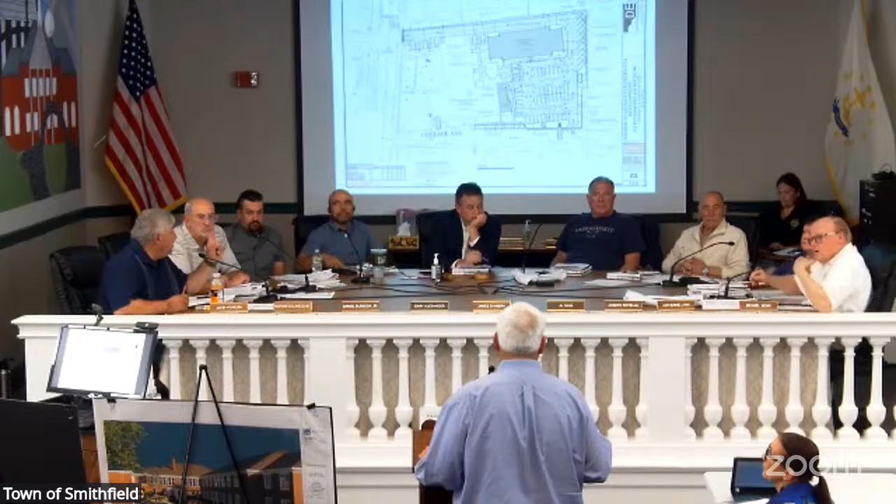Are you here to address what transpired at the public meeting? Not necessarily, 'cause I'm curious as to what other things came up. I think there are some neighbors here that I'm sure are going to speak, but people were concerned about the view from the residences on Hattie Ave. So we addressed that with a row of arborvitaes and an opaque fence along that line. One of the neighbors was concerned about the dumpster placement, so we moved that to a location that we felt was as far away from all of the neighbors as possible.

What was the other one? And the smoke, they were worried about smoking, and it's a tough site because I think the law is they have to be 25 feet away from any building. This is a non-smoking facility. I actually Googled what the percentage of smokers are at that age, and you're probably gonna have about 10 to 12 smokers in this new development. But obviously there's probably gonna be a couple of people that are smoking once in a while outside.

So we wanna work with the neighbors. I'm not sure if we've decided definitely on the front of the building, but we're happy to work with the neighbors on where that occurs. There was another lady who I know is here that has concerns about her driveway and people coming in, which David D'Amico can talk about. I don't want to speak for the neighbors. There was a lot of conversation, and I'm sure you'll hear from them, but we tried to address the things that we could address. Yeah, the arborvitaes were in the plan already to try to screen that property line as well.

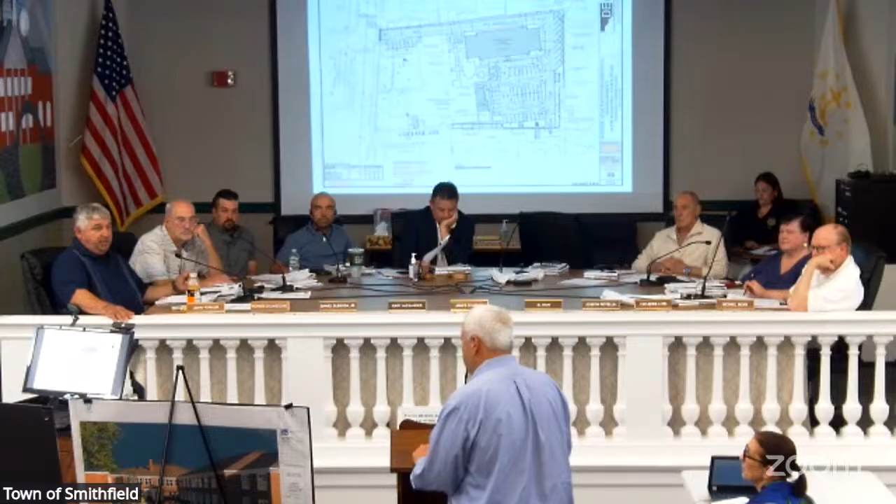I just thought of Papagino's. When you go out of Papagino's parking lot to 44, it's got that curve. If there's a decision to go just right turn only, something that would physically hinder it, so just a thought. I think it's a valid question, concern, and something we should discuss. Absolutely. Thank you.

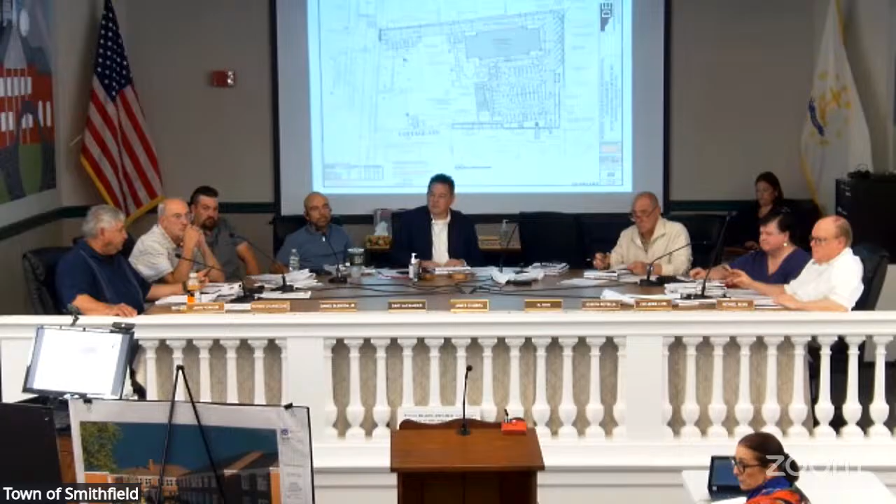So at this point, David, do you want to add anything? I think we're good. Unless you have any questions for the civil engineer, we could probably turn to traffic. I know you have your peer reviewer here, and Paul Bannon's also here. I don't know if you want to hear from Paul first to talk about how he responded. I think you have a copy of his response. I think it makes sense to go with our peer review and then have Mr. Bannon respond. That makes logical sense.

Well, are we accepting the traffic? Because didn't that come in late? It did come in late. When did you receive the peer review? Monday, and we got it right back to them. We got it at 5 last night. Right, but they received the town's peer review Monday, so they turned it around in like 24 hours. So they didn't have much time to respond. We really haven't had time to digest it either, but let's have the discussion and see where it leads, and then you can make a decision. In this case, given that they didn't receive it till late, that's a mitigating circumstance, in my opinion. And that's why it's good to hear from the peer review here tonight, so she can explain everything and give the board time to understand her report.

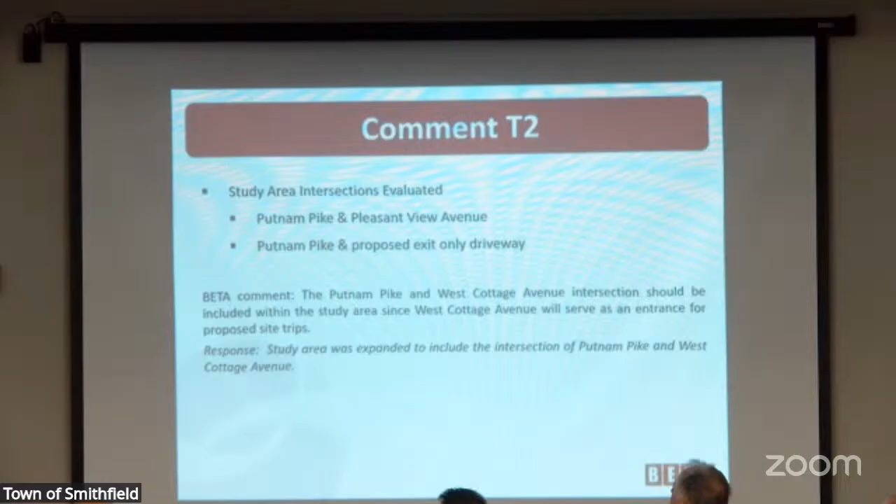Comment number 2, they had evaluated the Putnam Pike and Pleasant View Avenue intersection and the Putnam Pike and proposed exit-only driveway. The Putnam Pike and West Cottage Avenue intersection was not included, so we had just asked them to include that intersection, which they said that they did include that in the study area in response to our comment.

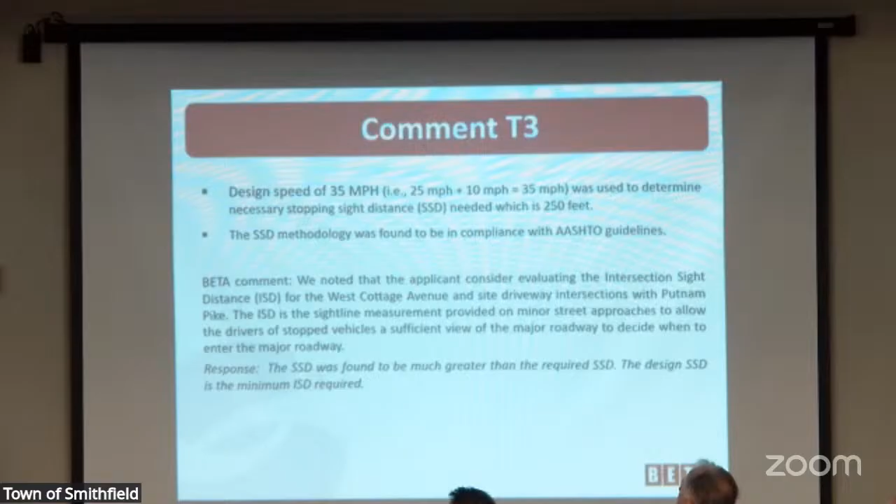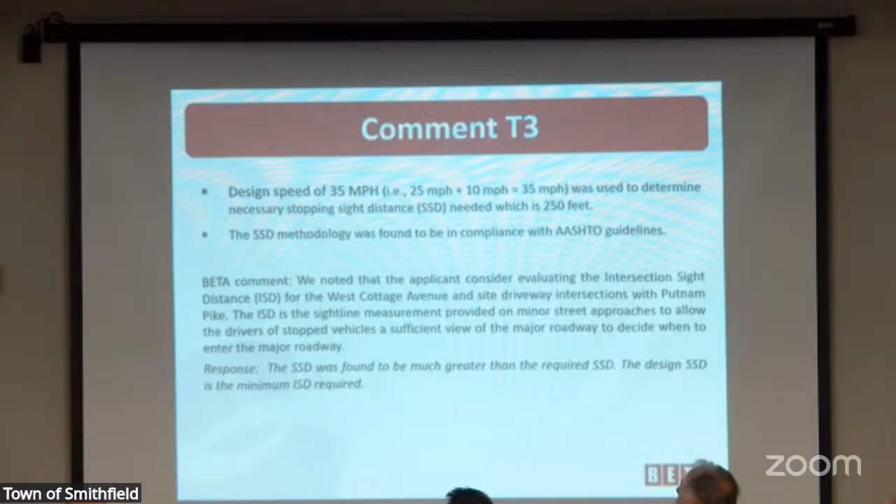Okay, comment number 3 gets a little tricky. So this is related to the sight distance. The appropriate stopping sight distance calculation, we use the design speed. A design speed of 35 miles per hour was used for this analysis. It's the posted speed of 25 miles per hour plus an additional 10 miles per hour to get you to that 35 miles per hour, which does meet the AASHTO criteria. And based on this 35 mile per hour design speed, the stopping sight distance needed would be 250 feet. So again, the stopping sight distance is the distance that a vehicle on the main line needs in order to be able to safely stop approaching an intersection, or really any object in the road.

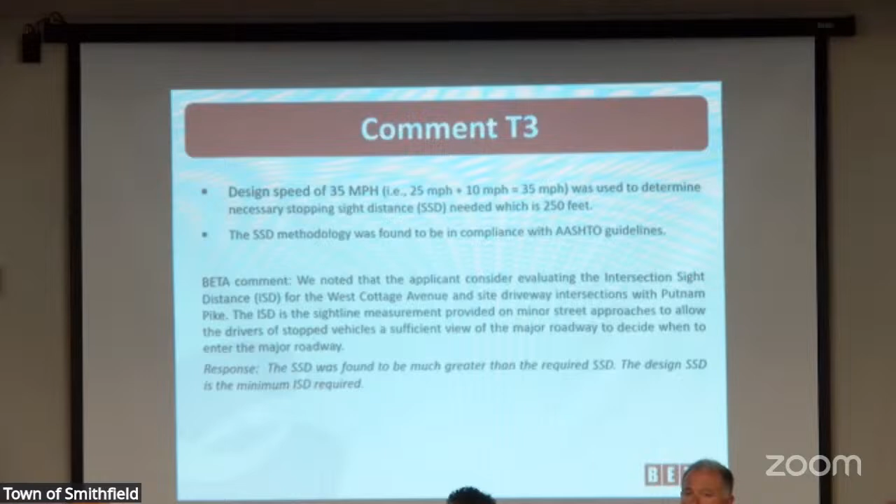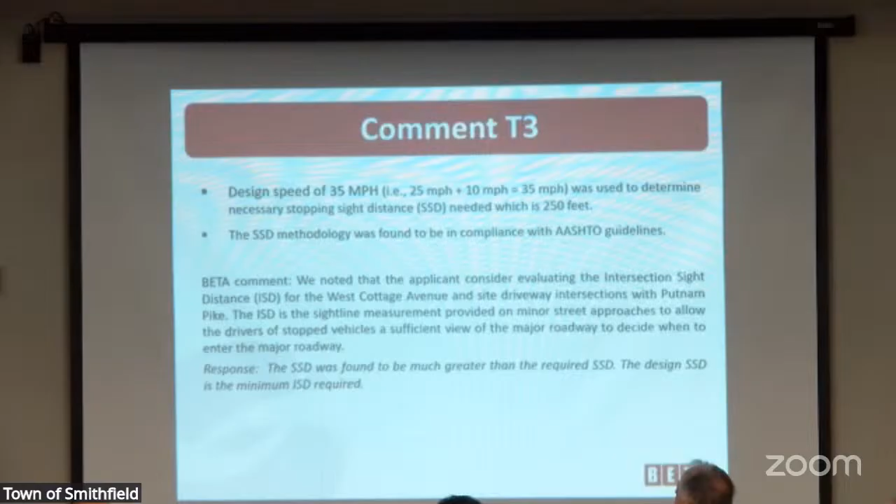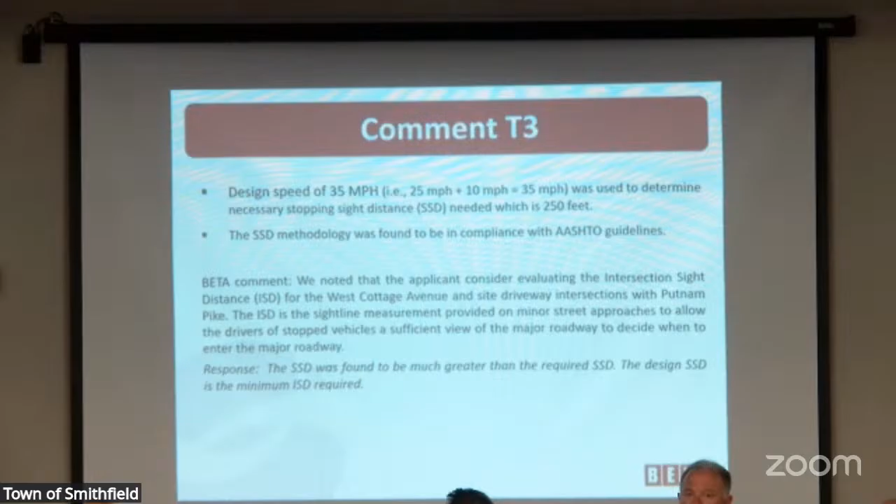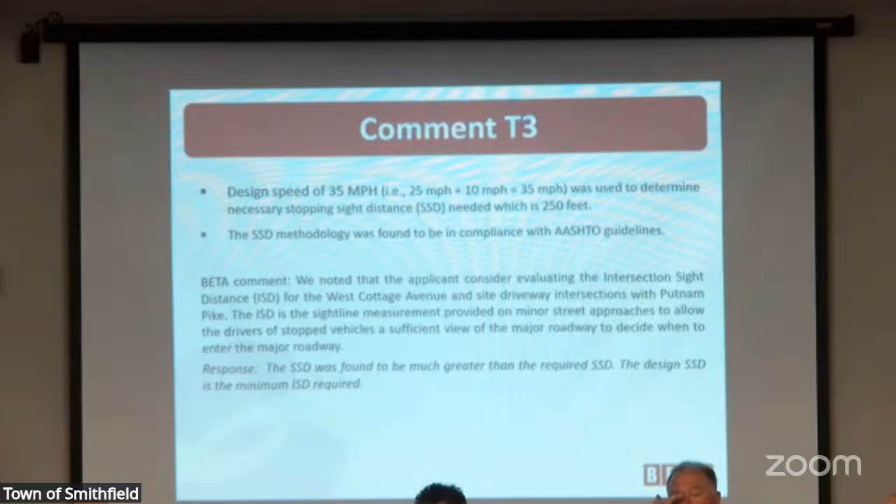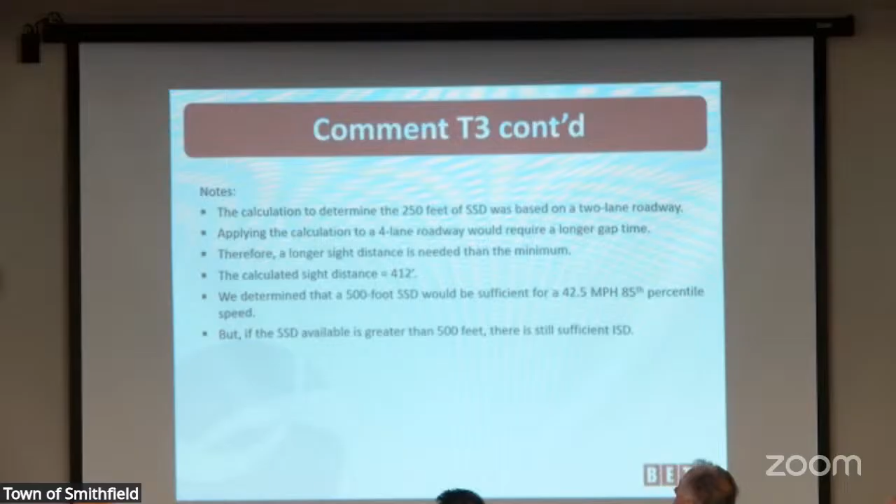Their response was that the stopping sight distance was found to be much greater than the required stopping sight distance, and that's the minimum that's needed, and that's sufficient. So a few notes about that was the calculation to determine that 250 feet of stopping sight distance was based on a 2-lane roadway. So we took a look at what it would be for a 4-lane roadway, which is what we have in front of the site. So applying the calculation to the 4-lane roadway would require a lot longer gap time, basically more time for a vehicle to actually exit the side street and get into their position along the roadway.

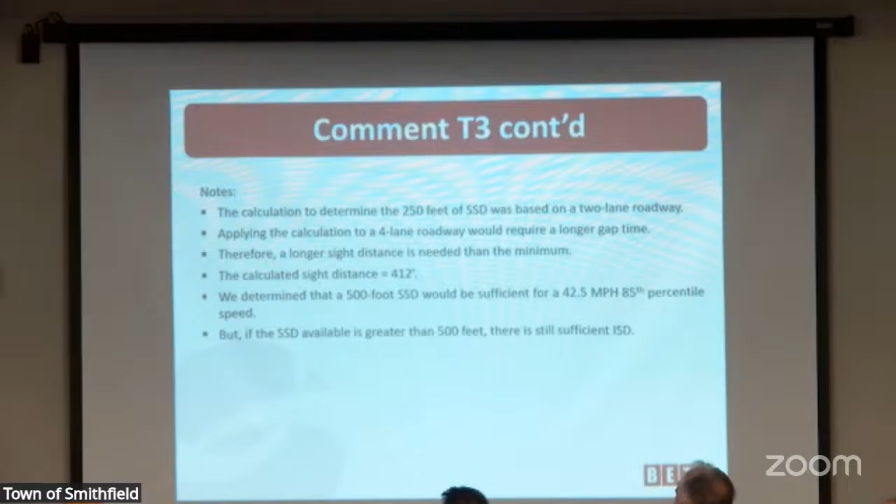So the longer sight distance is needed than the minimum. So we had calculated it, and the sight distance would be 412 feet. We took another step and we looked at, okay, the proponent said that there's 500 feet of available stopping sight distance at their site locations. So we back calculated a bit, and for the 500 feet that they say they have available, that would mean a 42.5 mile per hour design speed.

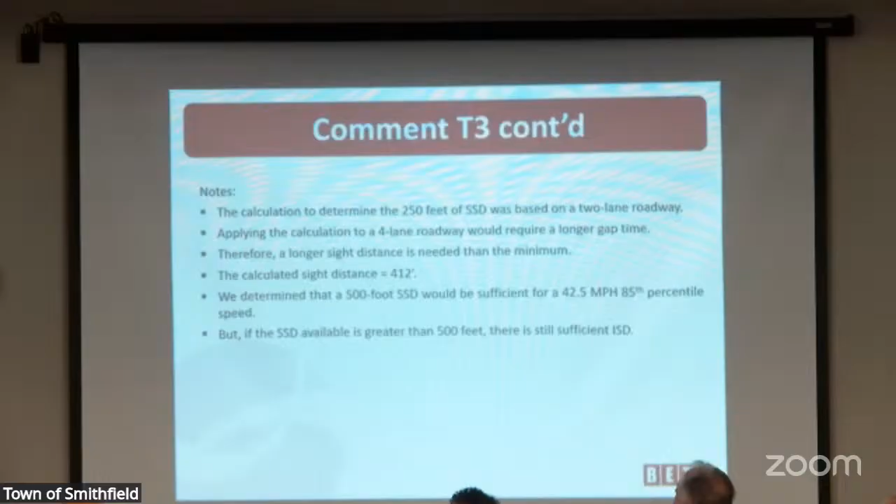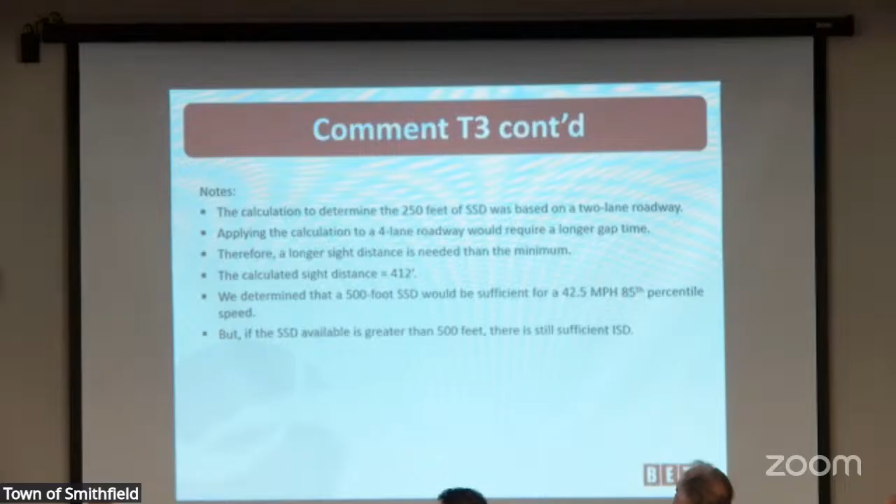So it would be appropriate and sufficient sight distance for 42.5 miles per hour, which is still less than, or the 42.5 miles per hour is greater than the calculated 35 miles per hour, and it's probably right around what the 85th percentile speed might be if they had taken additional speed data along Putnam Pike. Does that make sense? Okay. So again, comment 3, we don't really have further comment on that.

Comment 4 was really basically when they're exiting their site driveway, just make sure that the planting's less than 3 feet. It's pretty standard in designs, and we just want to maintain that optimal sight line, and the proponent agreed to make sure that they work with their team to make sure that happens. Comment 5, it's just a little technical comment with the analysis. It was just in the report. The future analysis year kind of varied throughout the report, so we just wanted to know what that analysis year is in fact, and the proponent said that they updated the references.

Comment 6, again, so the 5-year design year is pretty typical for RIDOT, so we thought maybe they might be asking for this in the future, the 5-year future design. But the proponent thinks that a 3-year design would be acceptable with RIDOT, so we'll let RIDOT review that. I don't see it making that much of a difference with the analysis, adding a few extra years on there, so.

Comment 7, no build. So with these traffic studies, typically you'll see an existing condition, which is present day. You'll see a no-build future condition, which is, in this case, 3 years out, could be 5 years out, could be 10 years out, depending on what the project is. And that no-build is really without the project, what the volumes are gonna look like, including a growth rate into those existing volumes for that future. And then there's the build, which is the future same year as the no build, but that includes the development traffic.

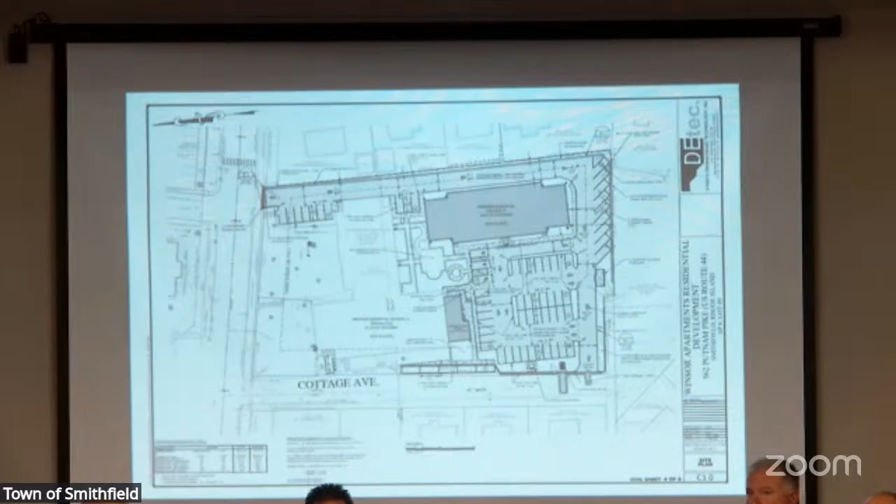And I just wanted to add that I wouldn't characterize our response as somewhat dismissive, as it was characterized. What we said is that is not our property. We can't do anything with that. And we actually said to them, contact your town officials, because I guess it's in a dilapidated state and might need some repairs. So we encouraged them to contact the town, but it's just not on our property. We can't improve that. That's all I think were new comments, unless you heard anything else.

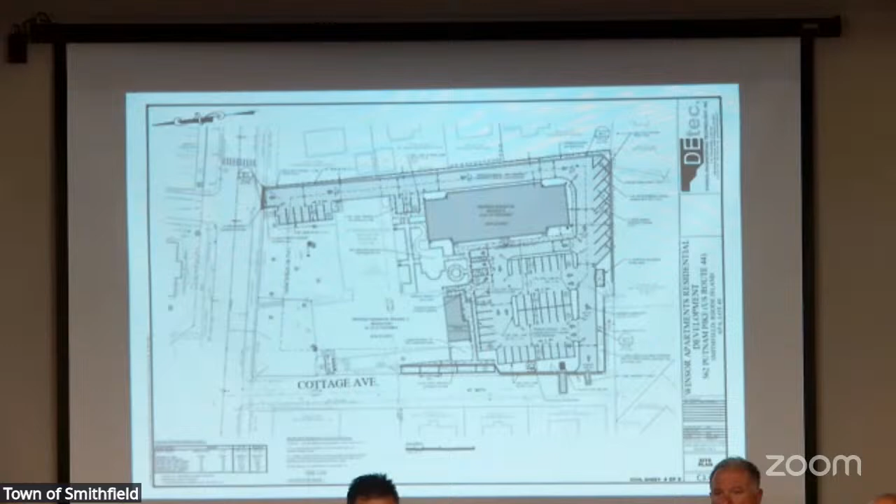So with that. So we want to continue this. Mr. Chairman. You got a question? Yes, of course. I'd like to question Sharice Miller, if I could.

With this type of development being created and the funding, what is the normal process for determining who the residents are? For determining who residents are? Is it just strictly off the list by who got on the list for that, or there must be a process for determining that? So in that situation, it's date and time of application. Okay. So the waiting list is advertised.

Yep. What I had mentioned earlier was the waiting list that we currently have for the housing that we currently manage. So sometimes families would be interested in applying at other locations, even if they're living at our property here already. So that's why I mentioned the waiting list. So is it an open application right now with this possibly happening? No, nothing can happen right now. There is a point in time where we would advertise, and that hasn't happened.

Okay, and it's whoever gets on that list first? Right, and basically they would see it where we're required to advertise when the time comes. They would see it, they would inquire with us, pick up an application, and they would apply. And they have the requirements of the income and all that process. There are also income limit requirements. There are different tiers of income limits in that property, so they would have to be eligible and within those income limits. All right, thank you. You're welcome.

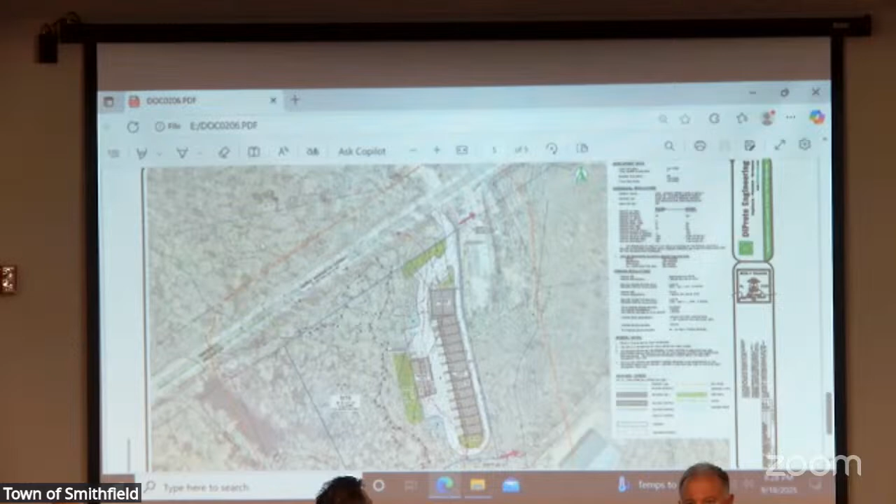There's a little bit of disconnect between how the economic growth overlay district works within the zoning ordinance versus that, which is a major subdivision now in the planning regulations. There's really not a master plan per se for this type of development. So in order to meet the requirements of the economic growth overlay, our next step would be master plan. So we're here to get any feedback, to get some sense of what you may want as far as traffic, whether it's going to be a full analysis or simply a safety analysis.

We are about 800 feet to the west of the intersection of Route 7 and 116. There is the auto body shop that's here. There's a vacant parcel or 3 parcels that are here. And then Mr. Conti's parcels are at the corner, we call it the southeast corner or southwest corner of 7 and 116.

So what is the development? What are you proposing? I'm sorry. Flex space, which would be these units here and a portion of this building here, and then office in this, and then office here.

So it's been a little while, but there's certain requirements in the economic overlay district that, my recollection is, if you decide to go that route, then you need to follow some of the design criteria, which are materials and different things like that. Yep. So this being a storage facility, are you planning on meeting those requirements?

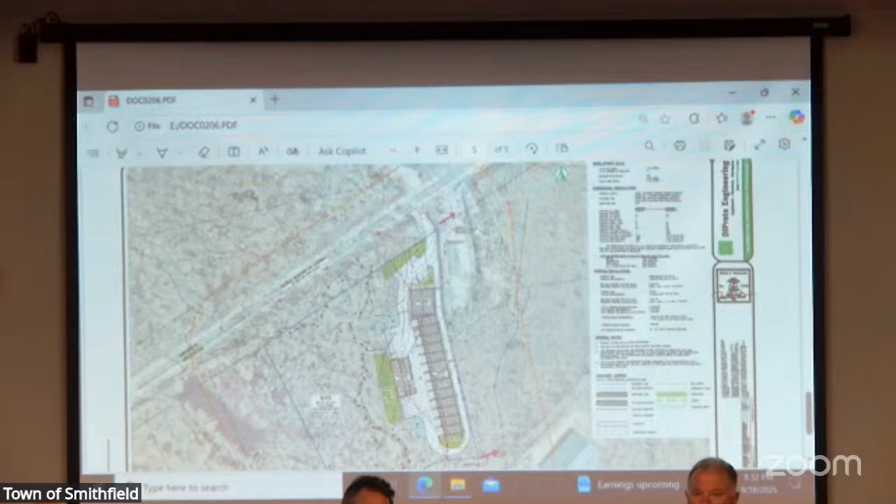And the topography on that site is very consistent with what we have here, where there's a high spot and then it slopes to the west. So the aesthetics on the upper level then lend to what's on the lower level. I mean, is it flex space? Absolutely, but there is a standard that we have to meet, and at the end of the day, it's permitted by right within the economic growth overlay district.

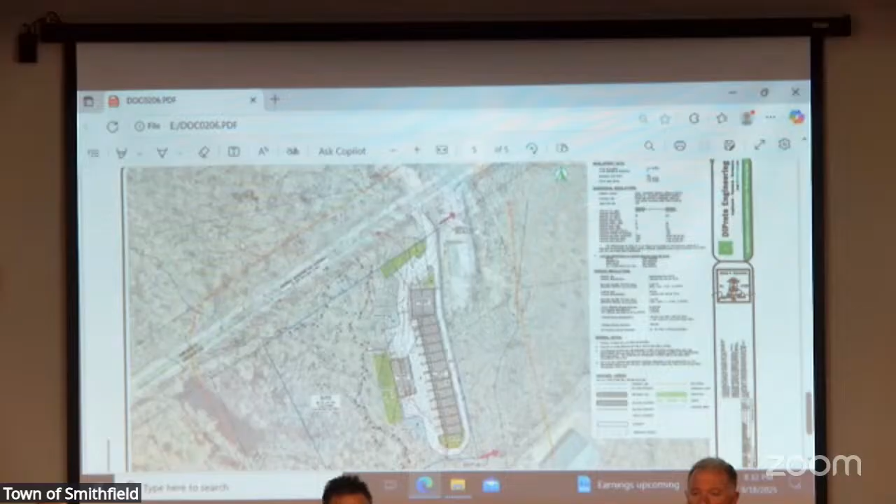Is there any residential? No. I think the town probably has enough of that right now. How many units are there? I think it was 13, 14 flex units and roughly about 5,000 square feet of office space.

Brian, I had another just general question, because remember when Mike and Richard were doing all these egos, and John, one of the theories way back in the day about this whole ego district was possibility of connectivity between lots to help alleviate traffic, not that I'm saying there's a traffic issue here, but to keep people off the main road as they could get from lot to lot, or from there to the hotel or things like that. I think this is an absolute perfect opportunity to do that.

Well, that was my question, is that something that's available? We're dealing with wetlands everywhere to cross over. No one's going to pay money to cross over a wetland to connect. But are there opportunities to connect so that these other lots that seem bare may have ways to connect to each other? So there was a little method to the madness with what we did down here, with potentially allowing a connection here. Also, if you'll see to the immediate south of the parcel, there is the infamous platted but unimproved Canton City Trail, which then brings you up to the back of Richard Conti's parcel.

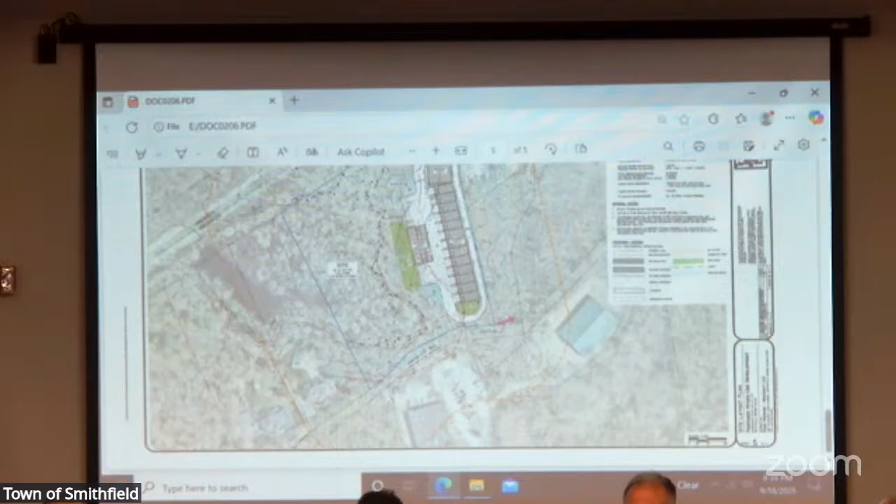Water terminates, there's a hydrant on the north side of George Washington Highway, about 250 feet west of the intersection. That would have to be extended. And again, you have the parcel that's on the opposite side of the street at the corner that I'm working on right now, also representing the owner of this parcel here and Mr. McCure. So we have an opportunity to get some collaboration here.

Any other questions or concerns? I know you've got a lengthy agenda tonight. I'm trying to keep my presentation respectful of those residents who came out tonight. But we will be back. Thank you. But I think if we can, while the weather's still good, get the site walk done ahead of the master plan, I think that would be our preference.

Is this one that we think that we're going to need a site walk on? I don't think so. I don't think we're going to need one on this. Okay. So, is the board comfortable with us now moving to master plan and dialing this in a little bit, bringing Mr. Calavecchio's concerns related to aesthetics as far as the building elevation? Okay. Thank you. Thank you.

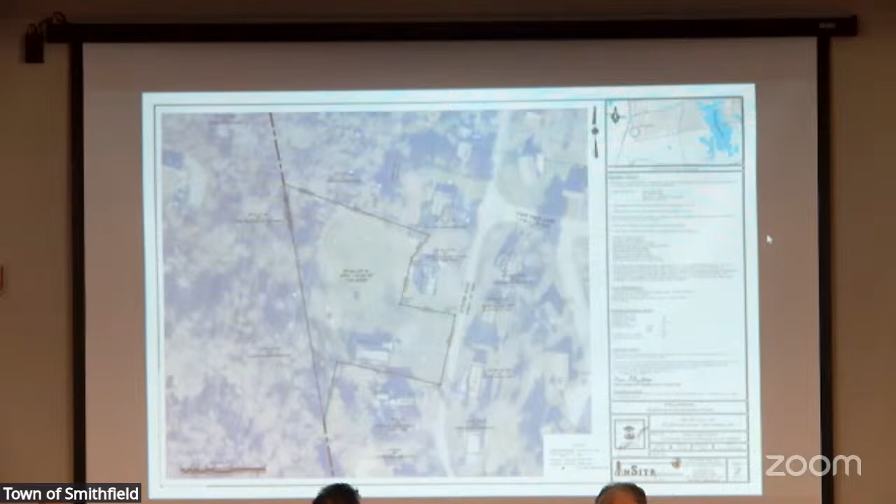The first one would be the lot width on parcel B. So lot width, as you know, is measured at the setback, and on parcel B, we have 104.99 feet of width, and so we would need a variance of 20.01 feet. And we also need a waiver from your design standards on interior angles. Parcel B contains 1 interior angle that's greater than 200 degrees, and parcel C contains 1 interior angle of greater than 200 degrees.

It's a pretty simple plan. That's it in a nutshell. It's not a comprehensive permit. It's a small subdivision. It meets almost all of your requirements. I do have the engineer of record here, Josh Morrow, and I'm sure he can address any questions that you have. Mr. Bowman is here also, who's the property owner, and Mr. Jamie Hainsworth is here also, and he is going to be the purchaser of the lots if you see fit to approve this plan. So owners here, applicants here, engineers here, they can answer any questions that you have.

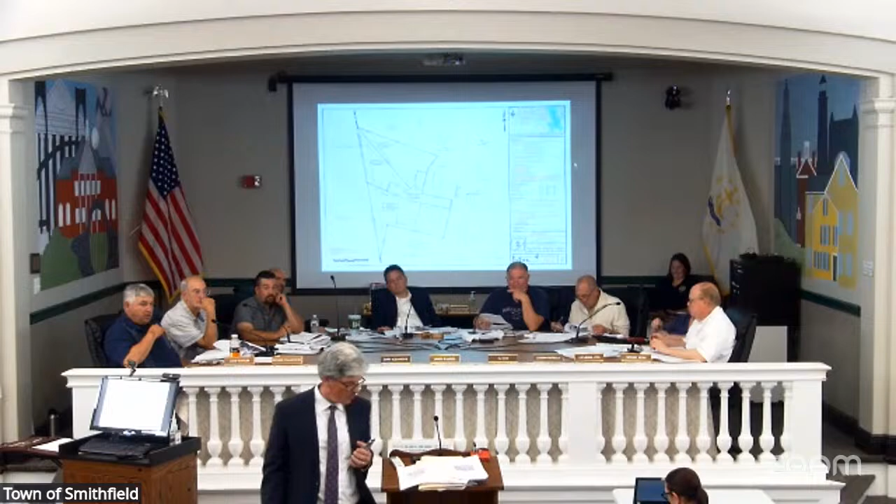So are we doing some soil testing for arsenic? We haven't yet, but we're waiting to see if you require that. I feel 2 ways about that. We're not a comprehensive permit, right? And I know that came up and it left maybe a bad taste in everybody's mouth because I watched what happened with West Greenville Estates, which was built on an apple orchard. And it's a 2-lot subdivision, so we would prefer not to open up a can of worms. I don't know when we stop with that. Every time someone wants to do an addition on their house or put a garage in, if it was built on an apple orchard, are we going to require testing? But anyway, you're the planning board and the issues come up, so we'll seek some input from you.

What's the general consensus on that issue? What's the relationship to it? It's right on the spot. Yeah, this area was surrounded by orchard. This is like the one little clearing. If you look at the staff memo, it came up at the TRC report. They asked us to look at the 1939 aerials, and we did. I just think even if we're building single-family homes, we're going to have kids playing in the yards. Whichever way you cut it, there's going to be families going in there. I think, Mr. Chairman, knowing what we know, I would be in favor of having testing done.

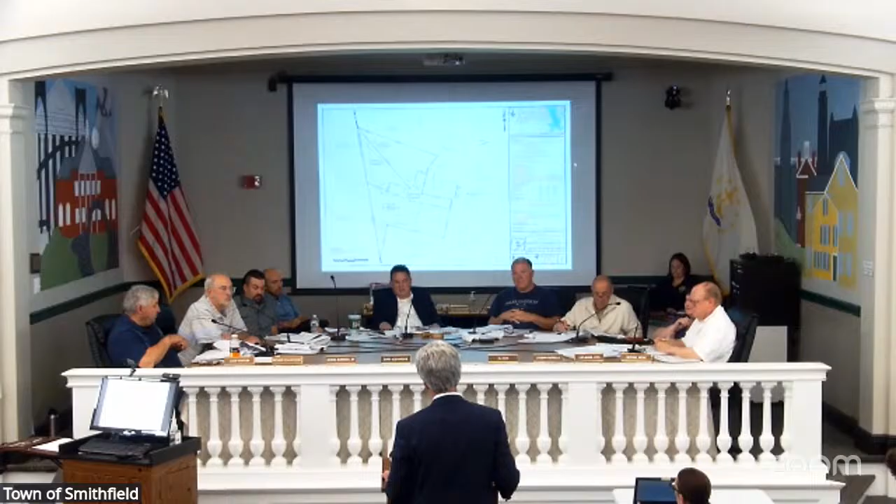Are you familiar with the testing that was required? Yes. Standard? Yes. Because if we're going to have testing, which appears to be the general impression, it's got to be consistent with what we did, in the requirement of sample sizing and how the samples were taken. So we could contact Hoffman Engineering. They're a fine outfit, if that's what the board wants. Of course, being an advocate for my client, I would prefer not to do that, but I understand your concern. We just required it. You have in some cases, and you haven't in others over the years. Not since I've been here.

Yeah, go ahead. Name and address? Brian P. Thalman, Principal, Thalman Consulting, 22 Maplewood Orchard Drive in Greenville. Swear to tell the truth, the whole truth, nothing but the truth? Absolutely. Mr. Bomir and I, like Mr. Kane, grew up in Smithfield together. We've probably known each other about 50 years now. And when the issue came up, he asked what I thought about it.

And I will testify to this board: I live in one of the lots that used to be an apple orchard, and I've lived in it for 50 years. Historically, Smithfield was farms and mills. Greenville, with its soils, was very advantageous for fruit trees. So you had peach trees, you had apple trees.

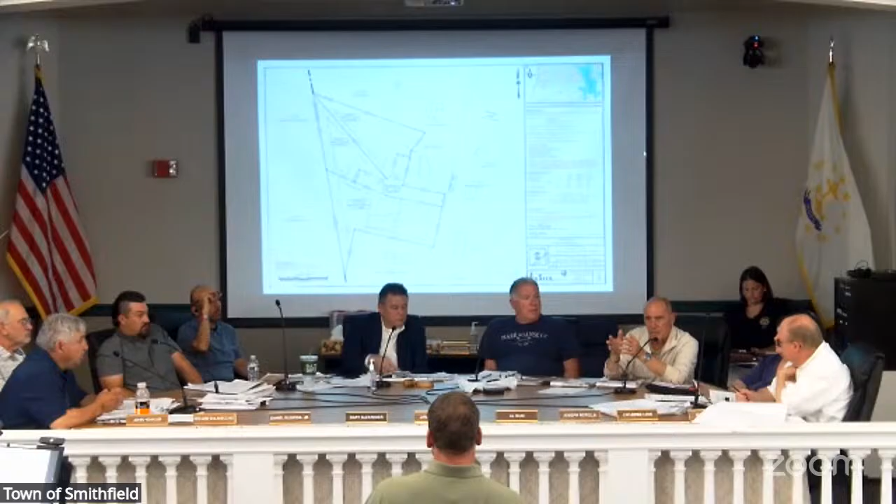Thank you, Chief. You got a question? Yes, Mr. Bomia, can I ask a question? You sold this about, what, 3 years ago? 3 years ago, yeah. Okay. When you sold it, there was no survey done? There was no survey done. Was there a metes and bounds description of the lot that you were selling? No doubt. I mean, if I bought a piece of property, I would go to the town hall and do my research to find out where my property lines were.

I hired someone to sell the home. I don't know what steps were taken to get to the point where Connor and his family decided to buy the home with regards to the property lines. And every time we spoke of it casually, use the yard. I don't really care. I have 3 acres of grass to cut. Somebody could use it. I don't use it. My kids are older. So to answer your question, I had no idea where the property lines were, and with regards to the transaction and the acquisition of the property, I don't feel it was my responsibility. Okay, thank you.

Was the fire pit there at the time? Repeat that? Was the fire pit there at the time? I own the house that Connor's living in. The fire pit was always there. Okay, so the fire pit was there, and then he added the garden, and he added the. Be advised that I own that property. When I bought that house, it was a shotgun piece of property, and I did an administrative subdivision and took that land and put it onto 33 Stair Road. So that's probably why the fire pit was there, because when I purchased 29 Stair Road, that lot went all the way to the back. Okay, thank you.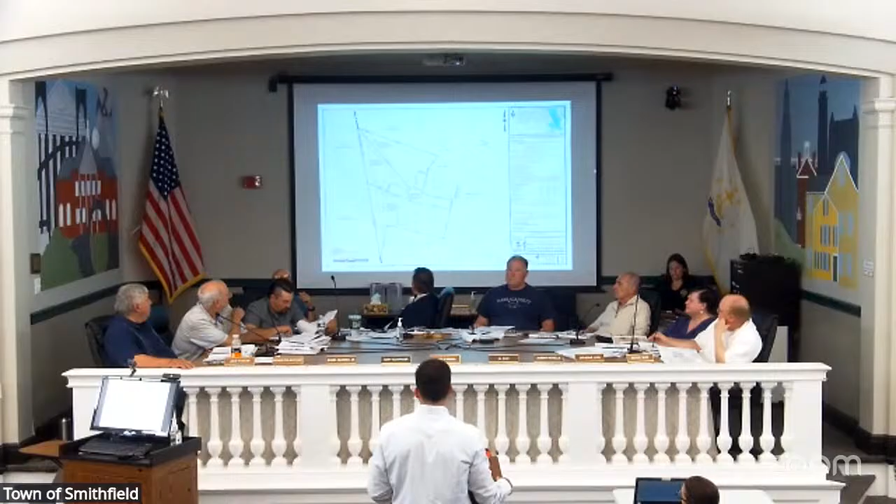But if you took what appears to be the driveway that's going north on the page and just went west on the page, and then just divided it up, and had one rectangular lot and another rectangular lot, and the driveway went straight, you'd still have the same amount of frontage. I don't see it. I don't see what you're saying. Yeah, I'll show what I'm saying. I don't.

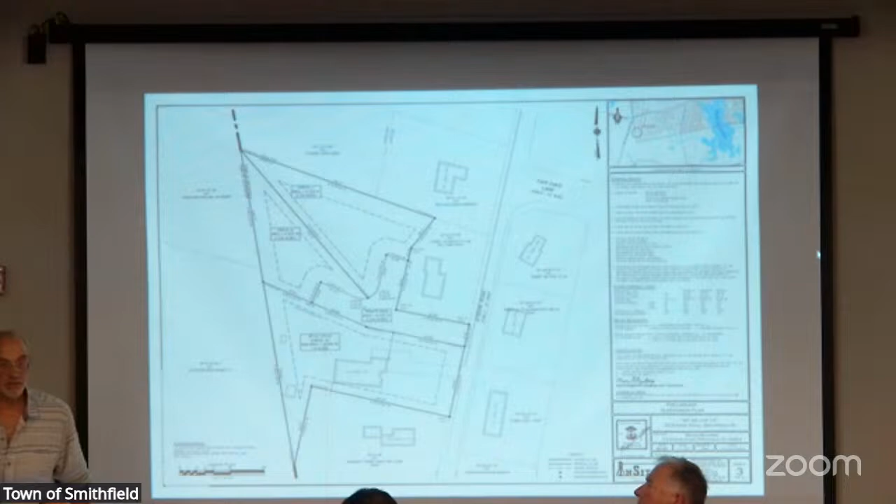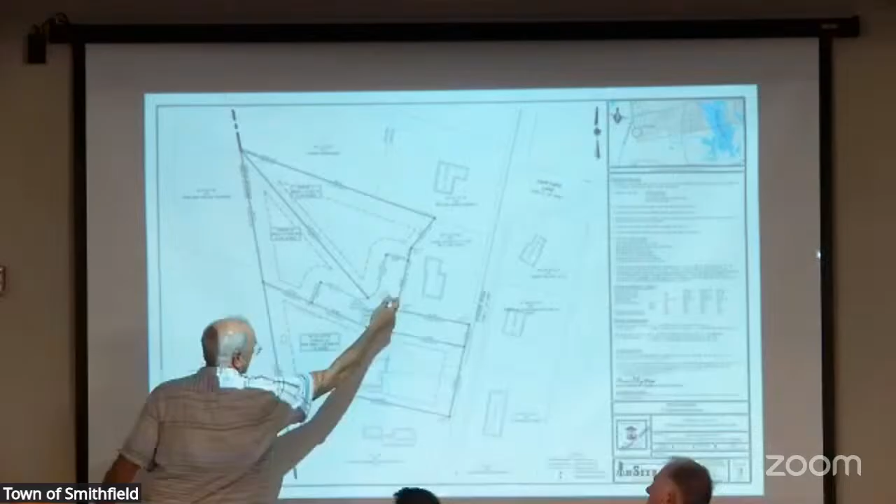You took this, it's here, and basically you go straight, now you've got two rectangular-ish lots, then you get the same amount of frontage here and there. And then that gentleman's issue, basically he's not gonna be looking at asphalt anywhere around here. It would be a simpler or easier solution to come here and then basically go whatever direction, kind of give them a chunk of green space. I don't see it personally yet. You don't see what? Only because there's not lines on the page.

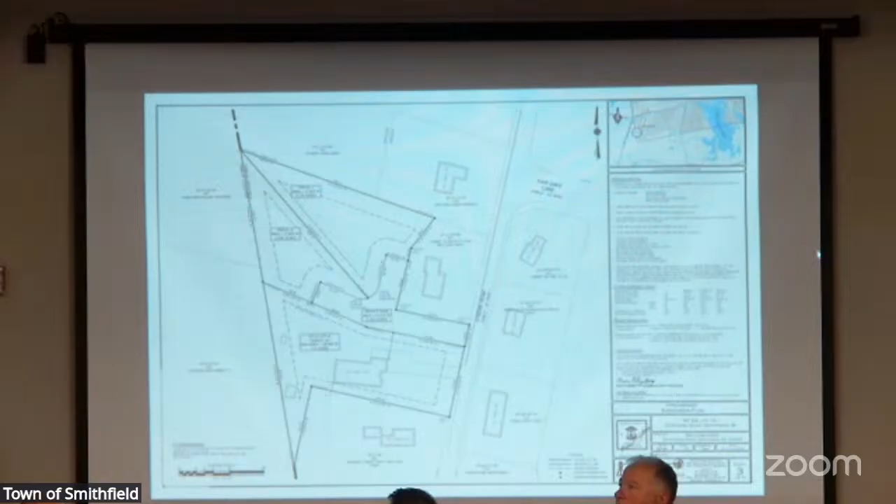I can't imagine it. Again, maybe we'll go back to the drawing board, right? We're getting a lot of input here, we have a neighbor concern. I'm a professional too, so that's why I'm concerned that you don't see it. I mean, yeah, but you can talk to him. Yeah, but we get the idea. So again, I'd ask that you continue it two months, and we can move it. Great, thank you. See if we can come up with something.

You'll need to continue it to the November 20th date. You'll need the clock. November 20th? Yep, you need the clock continued for the decision till that date, and in the meantime, they can conduct their testing. And so for members of the public, there will not be separate notice. Today is notice of the continuation to November 20th. Do we have a motion?

Mr. Chairman, I move that we continue this matter to the November 20th meeting of the board, with the clock being continued. Second. All in favor? Aye. Got two ayes in the corner? Yes. Aye. Okay. The ayes have it. Okay, that makes sense.

Next matter, Residences at 295, master plan review. Oh, boy. You know that. Yeah, right, who it was.

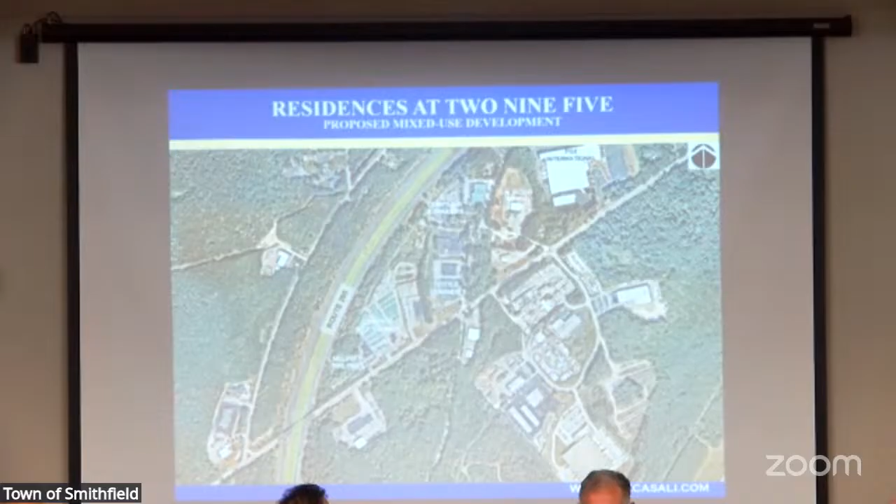I think one of the most important aspects of this project is its location. You can see from that aerial, I don't think I see a single family home within it. But adjacent to 295, 116, and you have the confluence of Paris and Rocky Hill. That's the subject parcel. Specifically, Assessors Plat 48, Lot 5, 34 Rocky Hill Road. It's about 3.5 acres. You can see it's really tucked away in the northernmost spot in the town, really next to a self-storage facility, behind the Little Learners daycare, and adjacent to the Easy Dumpster and Trailers facility.

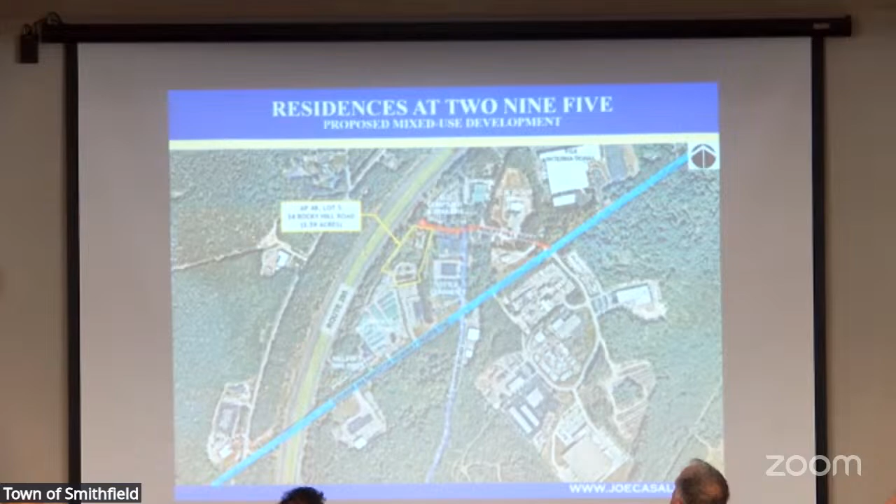So we've had the wetlands delineated, that is a real wetland edge. You are seeing only a 25-foot buffer because of the size and makeup, 20-foot structure setback, but a 100-foot jurisdictional area. So without question, Mr. Chairman, we'll be going to the Division of Freshwater Wetlands and seeking a permit from them.

As Julissa said, we are in the planned corporate district, in the economic growth overlay district in terms of the overlay boundary, which carries with it only a 25-foot rear setback. But in terms of comporting to the code, 35% of that buildable land area has to be mixed-use development in the EGO, and 65% of that land area has to be residential. So by its statute, it is a mixed-use development comporting with the EGO zone.

So in terms of unit count, 20 units per acre are allowed in the EGO district. So the 2.3 acres that we're proposing to be residential, 46 units is allowed in the underlying zone. And then in accordance with the comprehensive permit density bonus, at minimum 5 units per acre will be added with 25% LMI, which this project is proposing. So that adds another 11, garnering 57 units by right.

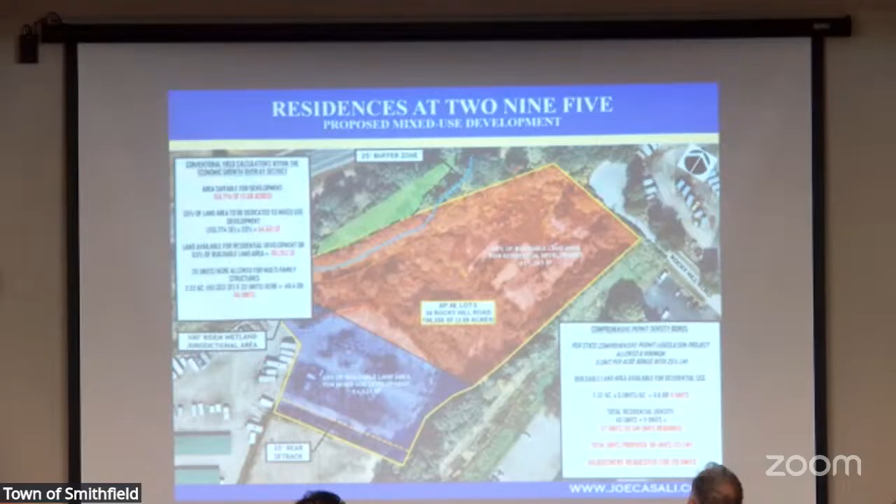One of our adjustments that we're asking for is 29 additional units, 86 total. 25% or 22 of them will be low to moderate income. So that's the first of the 2 adjustments, is the number of units. You can see, Mr. Chairman, this is all going to be in one structure. It's a 4-story multi-family residential structure. That footplate that you're looking at now is about 19,600 square feet. There will be 4 of them stacked on top of each other.

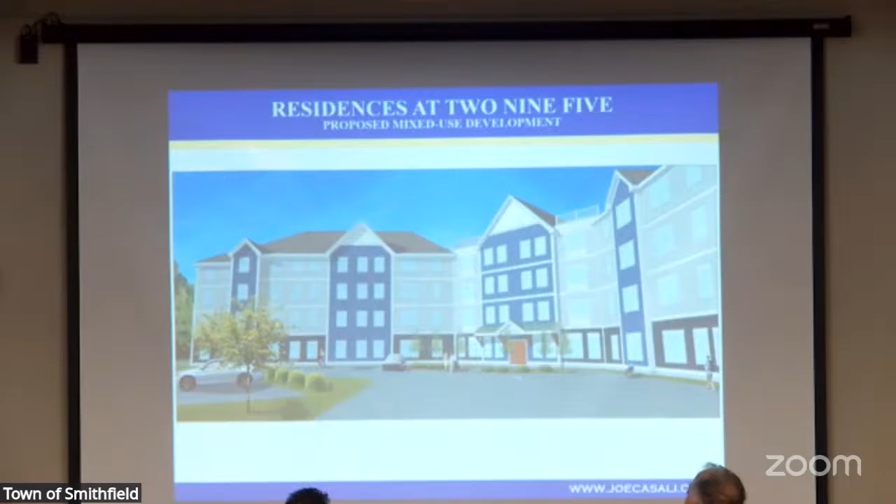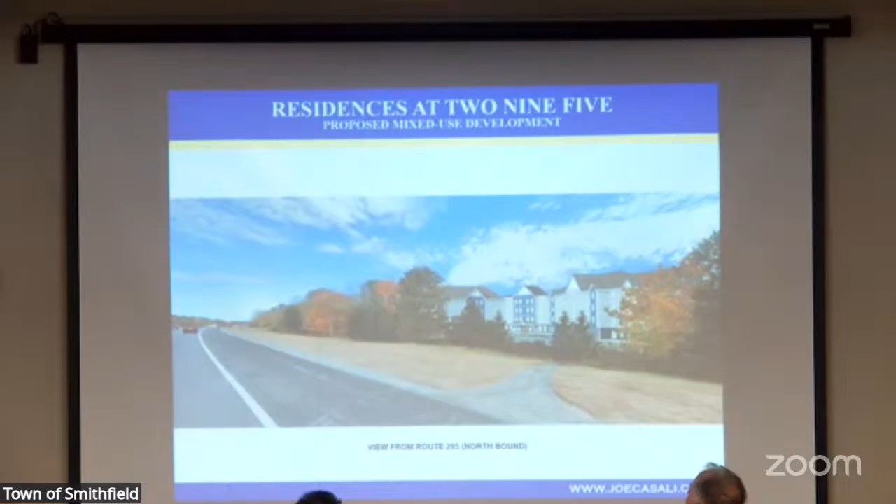Ed Wojak, our architect of record, that is what we propose that this structure may look like. And that's a view if you're heading out of town 295 north. You can see how it's going to be embedded into the landscape, and that you'll have some visual effect from it, but not much.

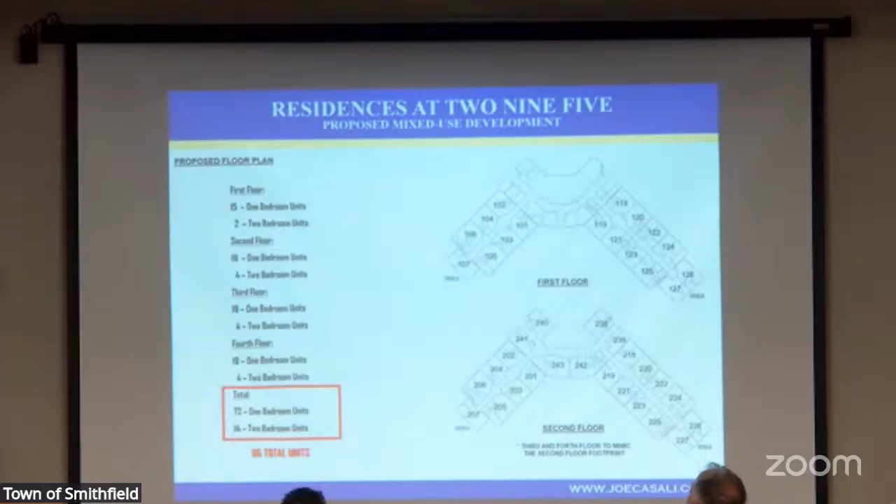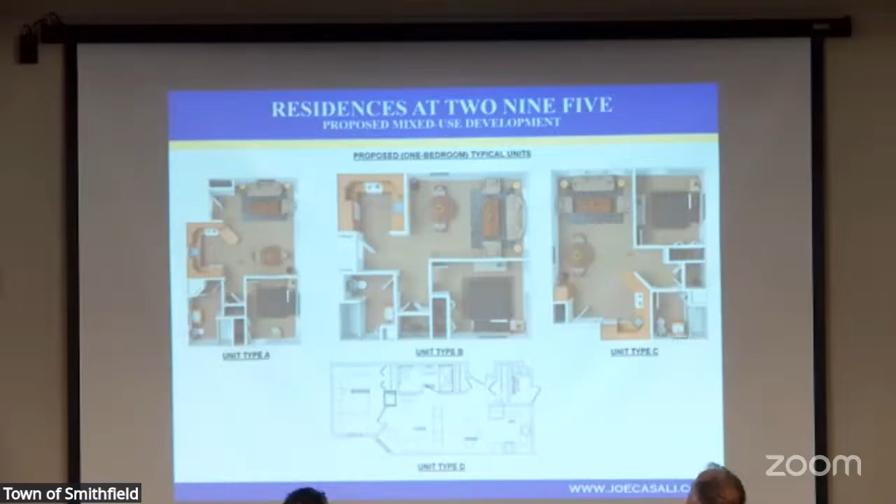When we look at the floor plans of them, 86 total units, but 72 of them are 1 bedroom. And that's another unique characteristic of this project. There are no 3, 4, 5 bedroom units. 72 of them are 1 bedroom and 14 of them are 2 bedroom units. You can see that we have 4 different type 1 bedroom units, and we also have 2 different type 2 bedroom units.

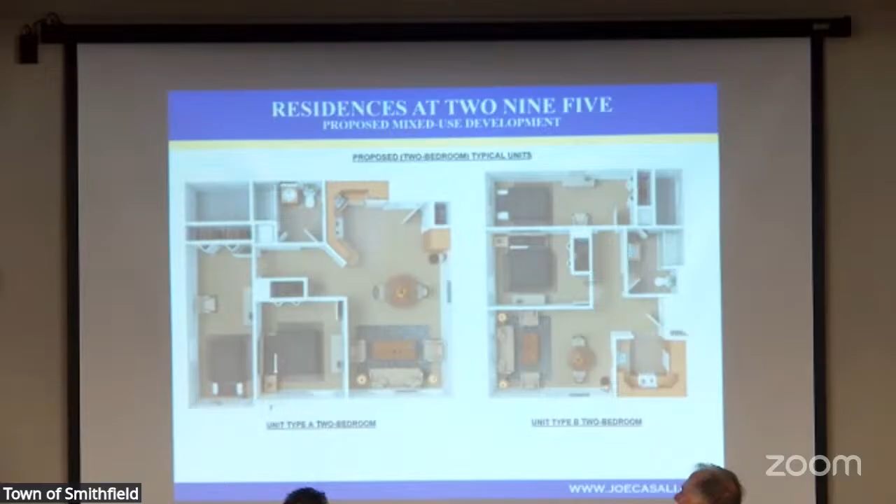And accordingly, of course, to comport with statutory requirements, we will disperse all of these LMI units within not only the 2 bedrooms and the 1 bedroom and the different types, but also on the different floors.

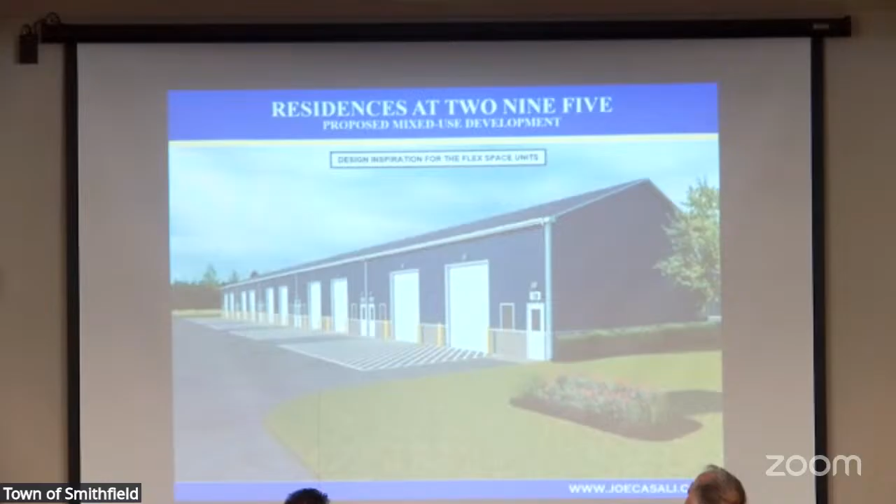When you look at the commercial component of this, we're proposing flex space units, 8 of them that'll be in the south of the project, and that's some type of a design inspiration that we would like for the flex units. Very typical of what you see in town. You would have an overhead door and a man door so that we could have something like an electrician, a plumber, somebody in that commercial space to come in and out.

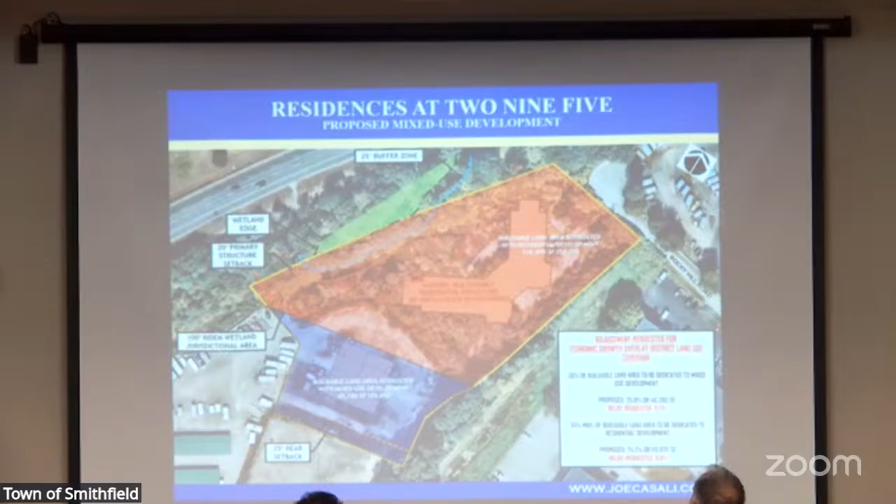So in terms of our second adjustment, we're asking that we not use 35% of the buildable area for the mixed use. We want to reduce that to about 26% or a relief of about 9%, and then accordingly increase from 65% in the residential up to 74%, so asking for almost 9%. So again, the 2 adjustments are the number of units and just moving around some of the ratios in terms of commercial to residential development.

Drainage is pretty straightforward. That will be easy enough to make work with all of the space that we have. Ultimately, everything moves its way into a stormwater basin within the federal highway on 295. Utilities, we're very lucky to have a 12-inch water main right outside of Rocky Hill Road. Speaking with the water departments, we don't expect any issues with pressure or volume. We'll have both domestic and fire protection servicing the building.

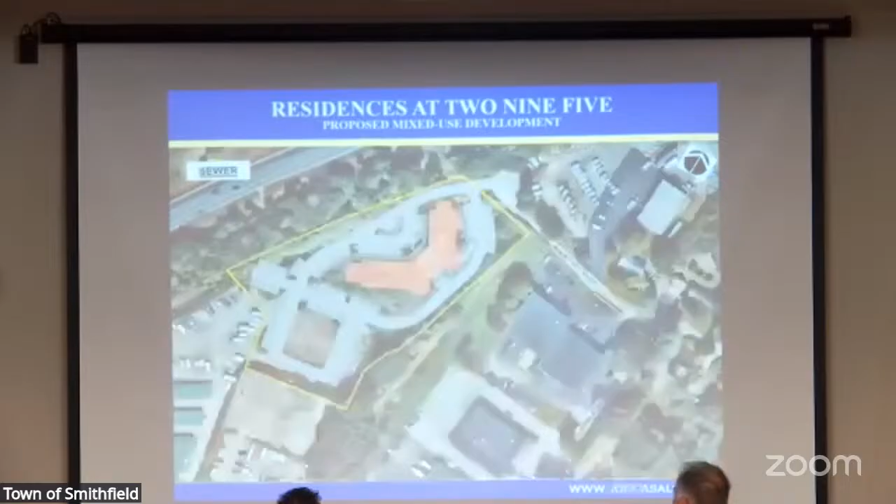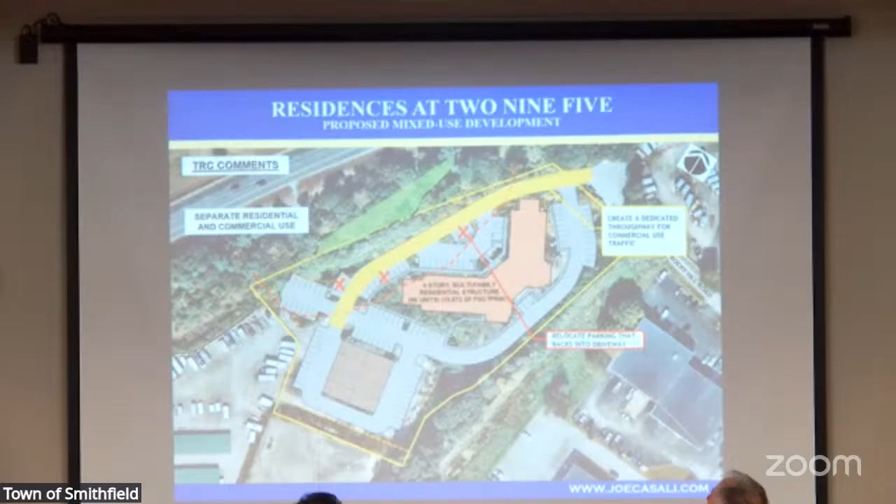And the same with sewer. We have a Bay Commission line right in Harris Road. We're going to extend that up Rocky Hill, a couple of pump stations to easily be able to service the residential units. Technical Review Committee, we've already appeared once. One of the key comments I think that they had was they wanted to create a dedicated throughway for the commercial traffic. We think we can easily make that happen, updating some of the layouts that you'll see when we see you again on October the 16th. But basically having one direct access in case there was ever an issue in terms of public safety.

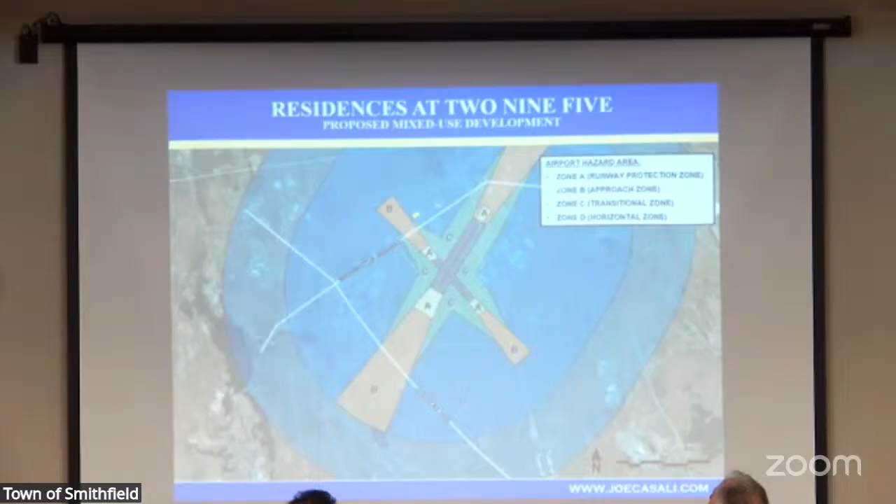Just lastly, to bring this up, you can see that little yellow dot just to the right of the B zone. We are not in any of the airport hazard areas. Zone D, which is what we're in, is a horizontal zone. It's not in either of the runways. The A and B zones are critical, and then the C zones as well.

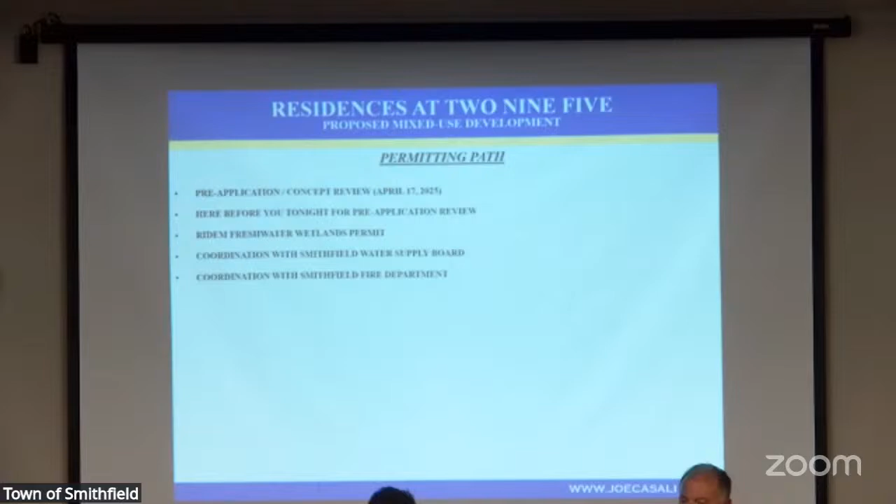So just in terms of permitting path, I know that we saw some of you back in April of this year. Tonight, unfortunately, because of the notice requirement, we're only here for our pre-application review. We will be back on the 16th of October for our master plan. And should we be successful, as you know, we still have a long ways to go with wetlands, Smithfield water, fire, Bay Commission for sewer, and then a plethora of permits from the town engineer's office, including stormwater, traffic, soil erosion, landscape and lighting, and then ultimately a preliminary plan and final from the administrative officer.

So again, I know it's a long evening. I appreciate you all staying and hearing us. What we really wanted to accomplish with this was to, if there is any additional feedback, we'd love to hear it from you so we can make some changes for the 16th. And if it makes sense to schedule a site review, is it possible to do it now so that we can get moving through our master plan?

Questions? Board? Yeah, well, is the topography, it's pretty much flat there, right? Yeah, it's reasonable. It's nothing that's gonna cause a concern, but there is enough slope that we can get the drainage to...

Joe, back in April, I had brought up a point about having some passive recreation area with some green space added. Yes. Have you added any of that? We haven't, but there's opportunity to do so. There's definitely opportunity within and around the building. Diane Soul is going to be our landscape architect of record. I'll ask her to craft some of those spaces.

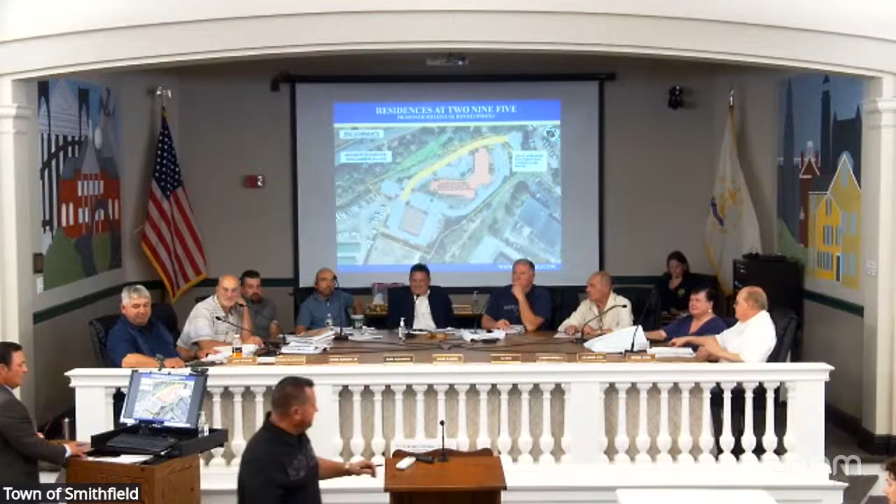Do I need to be sworn in? Or? No, it's not. Okay, okay.

No, it's not family. It's one-bedroom units. It's two-bedroom units. Part of this project, and one of the biggest things I took into consideration when designing this project is, not that I don't want to sell to families, but obviously one of the biggest concerns now is schools. And one-bedroom units do not bring school-age children. And truthfully, with only 14 two-bedroom units, I don't even see school-age children in this building.

Professionals, young professionals, even retirees. There's nothing like this in the town. There's nowhere for people who want to stay in Smithfield, sell their house and move to a smaller location where the landscaping's taken care of, the snow plowing's taken care of. This is a great opportunity for the quote-unquote baby boomers to have a place to go.

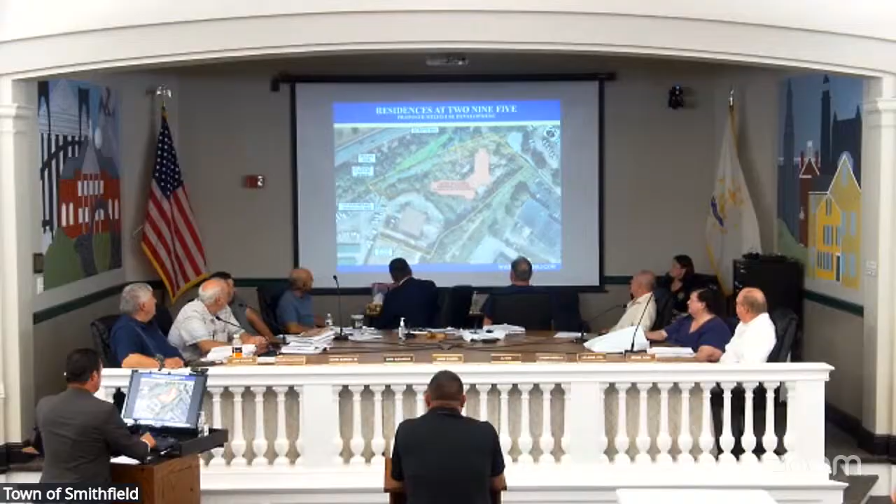Joe, are the plans on there, the actual plans? So if you look at the first floor plan, this is actually designed a lot like a retirement center. I have other plans, but on the first floor, you see there's a lot more of that white space. So the big room in the back is actually a community room. There's area for a potential hair salon. There's laundry rooms on every floor. Basically, everything is here for people who want to be able to use it.

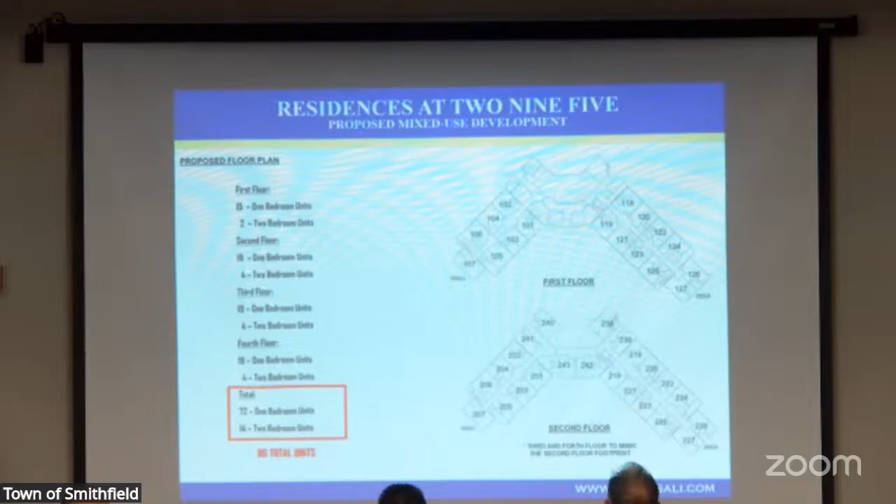You know, I love Catherine's idea of a little more green space. We could do a garden for people who want to go out there and do gardening. Truthfully, the playground part of it, I don't necessarily see because I don't see kids here. And that's just me. If it's something that the board requires, then obviously we'll do it. I have no problem with that. Well, you'll have grandparents there. There will potentially be grandkids over. Grandparents there, yes. So again, I have no problem with that. We're doing a small playground for kids to play in.

And, you know, I've been in this town my whole life. The owner of the property, Al Costantino, he's been here his whole life. It's not just put this thing up and walk away. This is something that I intend to keep. It's a legacy for Al, it's a legacy for myself, and we do the best we can for this town. Obviously, you all know I was on the planning board, and the two of us, that's how we live.

So any suggestions from the board, that's why I pushed to have this meeting tonight, because coming into October, when we come to master plan, I'd like to have as many comments and concerns from the board so we can address them in October. I also asked for the site visit potentially between now and October, so that's also taken care of, and the board feels good about what they see. So if anybody has any more questions for me, I'd be happy to answer them.

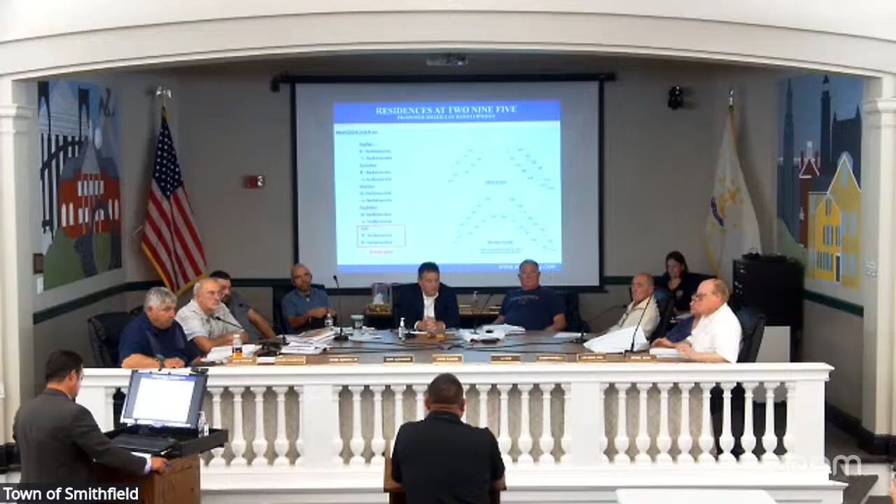Does anybody want a site visit, or no? We're comfortable with that. Okay. I'll take a drive by. Thank you very much. Anything else, Mr. Casale? Thank you, Mr. Chairman, we appreciate it.

I will open for general public comment. If anyone would like to be heard, please come forward. Just very quickly, the special meeting that you proposed in the senior center, the last time they came here, this room was packed. Is the senior center going to be big enough for that? There's a lot of movement on social media on this one. So make sure you properly advertise it so you don't get a lot of pushback from everybody.

I already looked into this. What they refer to as the ballroom has a capacity of 196. So, yeah. Okay. Anyone else who would like to make general public comment?

You have something, director's report, is that? That's our planner? Yeah. Hi, everybody. Since this was my first meeting and first time meeting a lot of you, I thought it'd be appropriate to give a brief report and overview some of what I've been working on with Chris in the department, and Mike for that matter, because he's still coming around a couple of days a week to help out, and some of my thoughts moving forward as well.